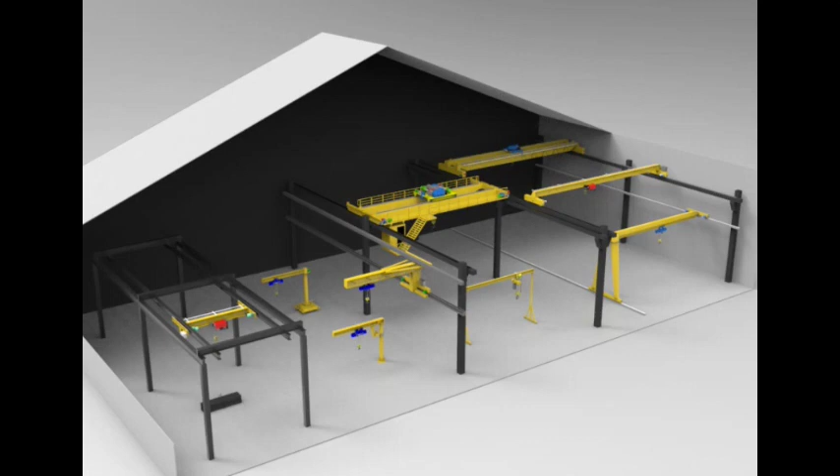Crane operation in workshops: bridge, gantry, and jib cranes. Workshops, whether in manufacturing, construction, or maintenance, rely heavily on efficient material handling. The seamless operation of cranes is a key component of this process.

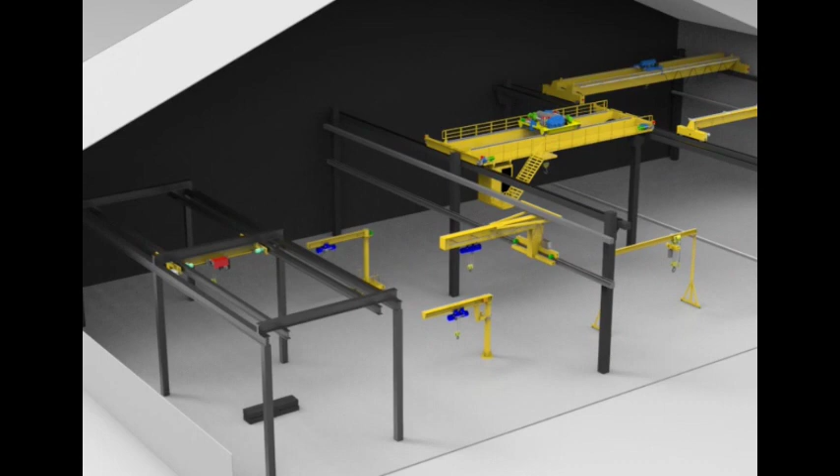In this video, we'll explore various types of cranes commonly used in workshops, including single girder overhead cranes, 1 ton to 20 ton. Single girder overhead cranes are a common sight in workshops. They consist of a horizontal bridge that spans the width of the workspace, with a single girder supporting the hoist and trolley. These cranes excel at lifting and moving loads within the workshop, making them ideal for tasks like transporting materials along assembly lines or moving heavy machine parts.

Under running bridge cranes, up to 10 ton. Under running bridge cranes are similar to single girder overhead cranes but are mounted on the lower flange of runway beams, allowing them to travel beneath existing overhead obstructions. These cranes are suitable for workshops with limited headroom and are commonly used for lifting and positioning materials or equipment.

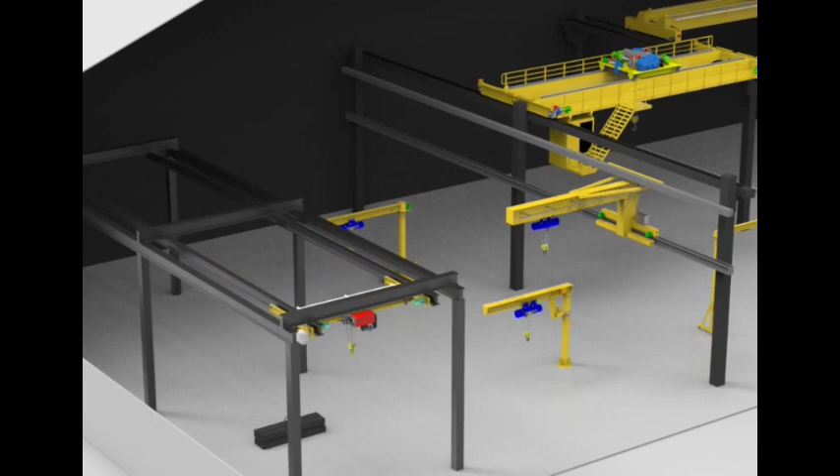Wall traveling jib crane, 1 ton, 2 ton, 3 ton. Wall traveling jib cranes are mounted on the workshop walls and consist of a horizontal boom with a hoist or hook attached at one end. They are excellent for moving loads within a specific area of the workshop, such as machine shops or workstations. They offer precision and flexibility.

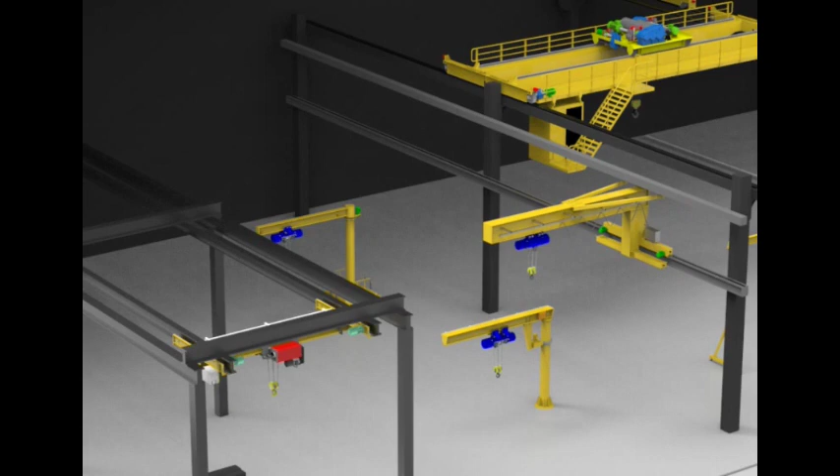Floor-mounted jib cranes, up to 16 ton. Floor-mounted jib cranes come in two varieties: rotating and hoist traveling. They are mounted on the workshop floor and have a vertical column with a horizontal boom extending from it. These cranes are versatile and can efficiently handle materials and equipment, making them valuable tools in workshops for tasks ranging from machine maintenance to assembly line support.

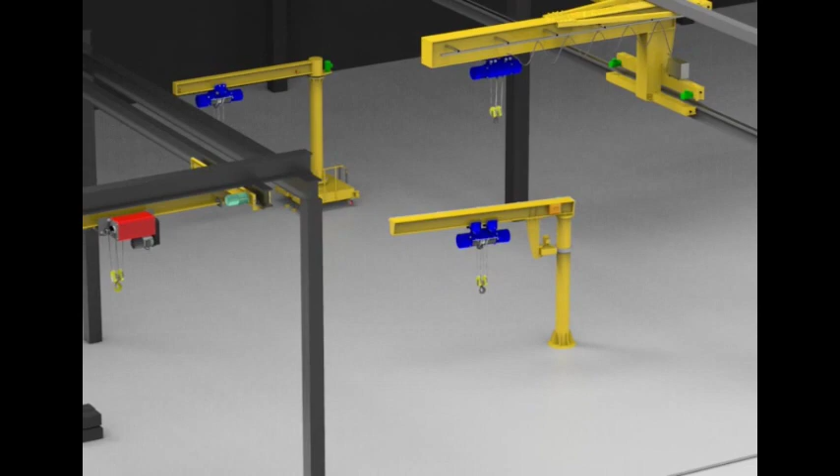Double girder overhead cranes with open winch trolley, 5 ton up to 320 tons. Double girder overhead cranes feature two horizontal girders supporting the hoist and trolley. They are capable of handling heavy loads, ranging from 5 tons to 320 tons, making them a powerhouse in workshops. These cranes are indispensable in heavy industries and large workshops where precision and strength are essential.

Semi-gantry cranes, up to 20 ton. Semi-gantry cranes are a hybrid of gantry and overhead cranes. They are supported by one end on a runway beam, while the other end travels on the workshop floor. Semi-gantry cranes are suitable for workshops with varying load sizes and layouts. They combine the flexibility of gantry cranes with the precision of overhead cranes.

Top-running single girder bridge cranes, 1 ton to 20 ton. These are similar to single girder overhead cranes but with the advantage of being top-mounted on runway beams, providing more headroom. These cranes are versatile and can efficiently handle materials and equipment, making them valuable tools in workshops for tasks ranging from machine maintenance to assembly line support.

Simultaneous operation of two cranes. In some workshops, simultaneous operation of two cranes is necessary for lifting exceptionally heavy loads or managing complex material handling tasks. Safety and coordination are paramount when using multiple cranes concurrently.

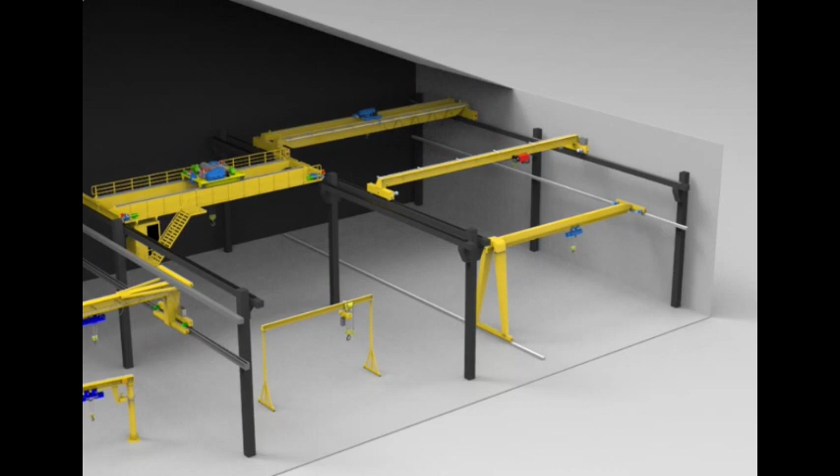In conclusion, workshops rely on a variety of cranes to meet their unique material handling needs. Whether it's a single girder overhead crane for precise tasks or a double girder overhead crane for heavy-duty lifting, the proper selection and operation of cranes ensure efficient workflow and enhanced safety in workshop environments.